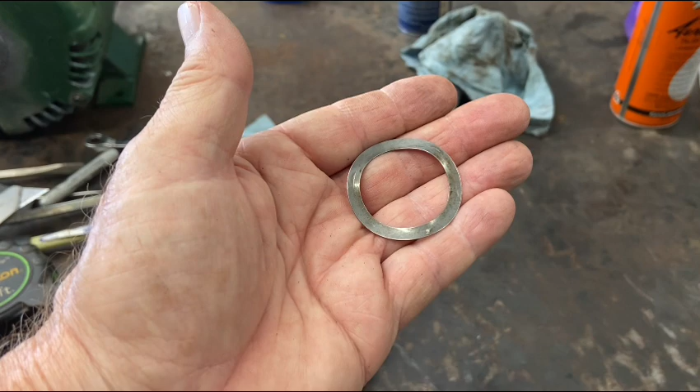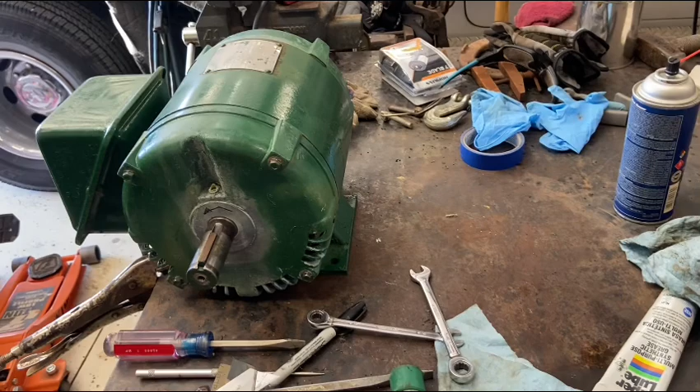Well, it's a noisy beast, even after I lube the bearing, but it works. It would probably be less noisy if I remembered to put the thrust washer in on the one side for the bearing. So back apart it comes. Well, noise-wise, that's not much better. But at least the thrust washer's back in where it's supposed to be.

Yeah, we got a reasonably decent coast down too. I'm just chalking this up to a noisy motor. To be honest, I really don't care.

Okay, enough about motors. Let's start laying out for a steel base for the drill press. And once that's done, I'll see if I can't configure a way to mount a motor to do belt drive. I did annotate the motor rotation on the cover there, so I know which way that thing's spinning, because that's kind of critical for when I hook up belts. I don't want that drill press spinning backwards.

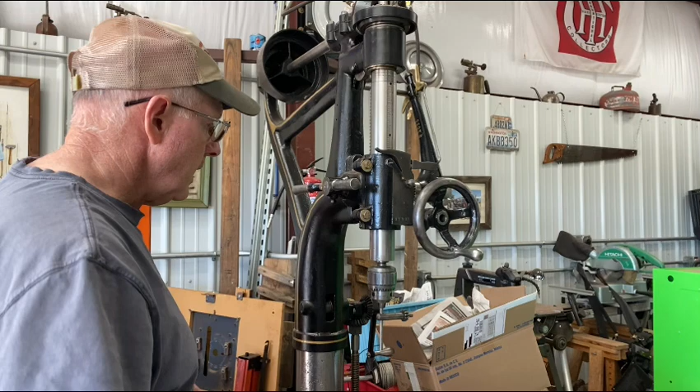Okay, for this chuck to spin in the right direction for drilling, this upper pulley has to turn counterclockwise as you're facing the drill press. So that tells me how I have to orient that motor. Well, here, let me show you. I have to orient the motor such that this pulley spins in this direction.

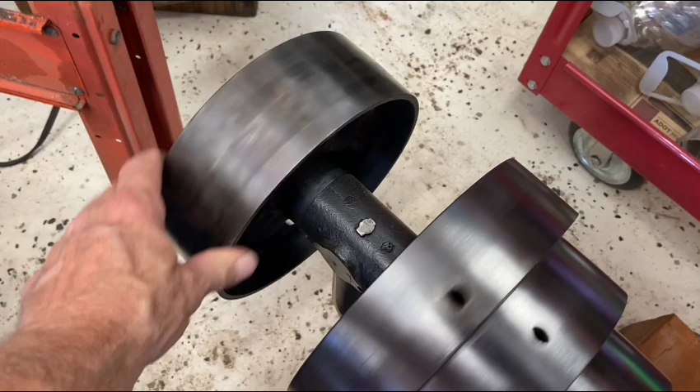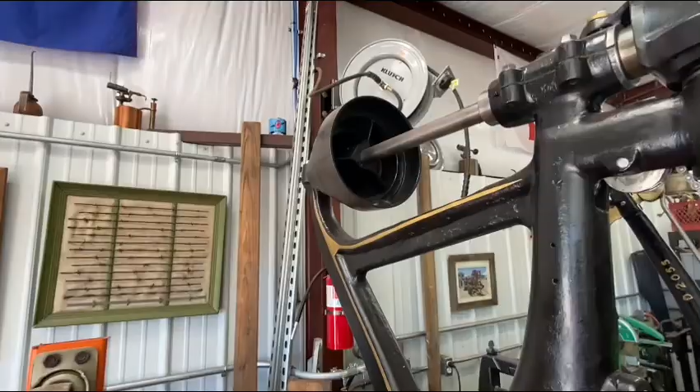Yeah, so I got a belt from there up to here. That's one long belt. That's going to cost me a small fortune at Bearing, Belt, and Chain. But anyway, you get the idea what I'm about here. So I got to get the tape measure out and the sketchbook.

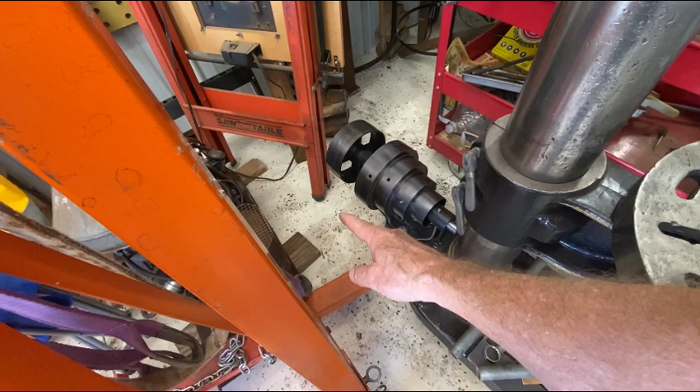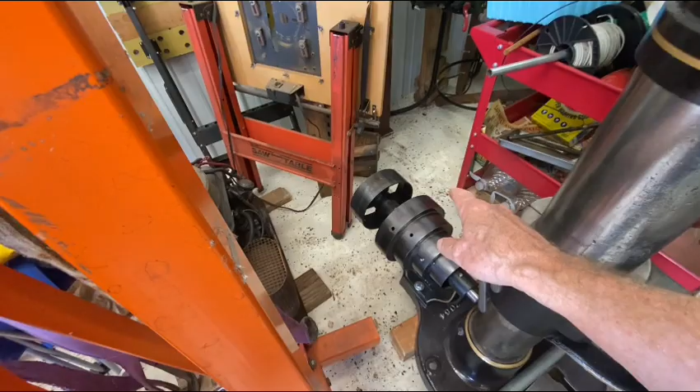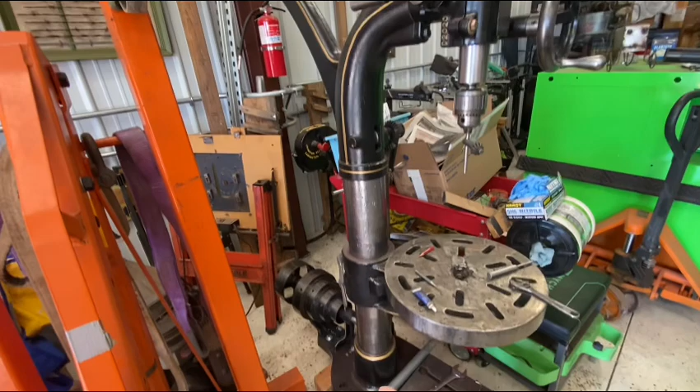I won't bore you with much of that, but I got to measure up this base, how I'm going to do it. Of course, I'm going to have a basic framework under the bulk of the drill press here, but I also got to run it back that direction because I have to build a motor mount to mount back there to run that pulley, and also so I can have rear casters back here so this whole thing doesn't have a tendency to tip backwards. I'm going to have a lot of weight on the back side of this, so it will have a tendency to tip backwards unless I can counteract that with a frame and casters back there. All right, so I'm going to get to measuring.

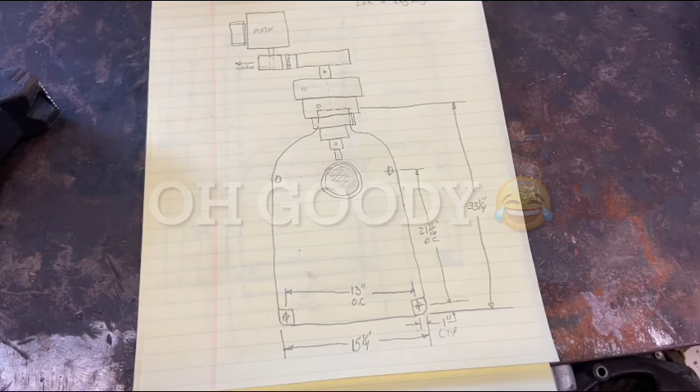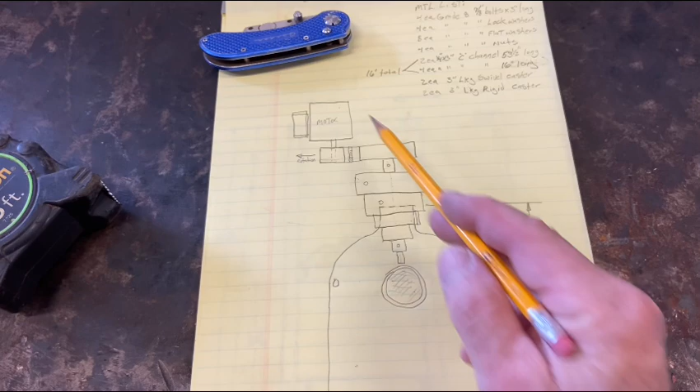Okay, it's chicken scratch sketch time. I laid out a plan view, or an overhead view looking down, of the base of the drill press and where the column is, and the step pulleys, and then the driven pulley from the motor. And because of the rotation of the motor, I got to mount it farther back like that with the shaft pointing at the drill press. Basic thing is 15 1/4 wide. Overall length of the base is 33 1/4, but I got to go beyond that to provide support for the motor.

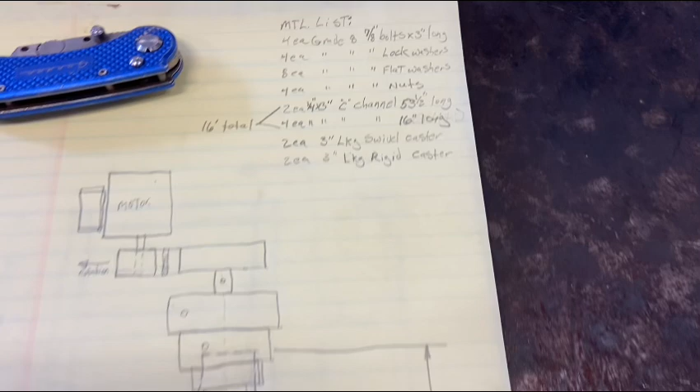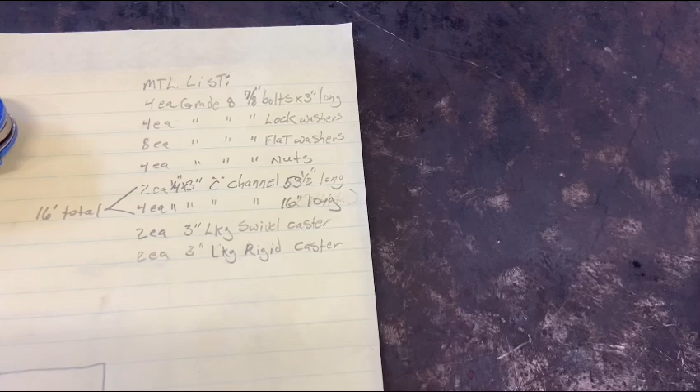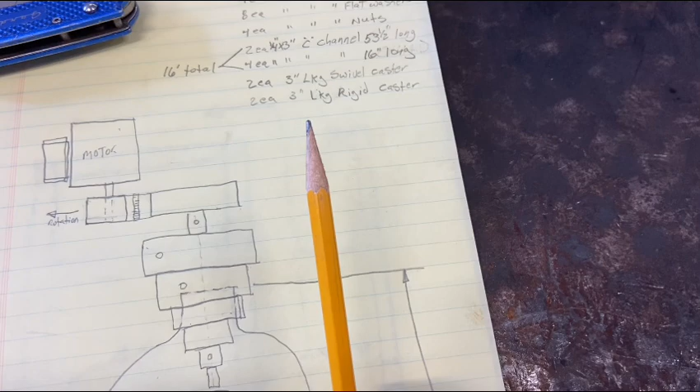So I threw together a basic material list. I'm going to use 1/4 inch thick 3-inch C-channel. I'm going to have to go buy some grade 8 bolts. The holes in the base are 7/8. Good luck finding those. I'll probably have to go with 3/4, which I'm not really fond of doing, but I'll do it if I have to. I'm going to get some 3-inch swivel casters and rigid casters, and they got to be locking so this thing doesn't move.

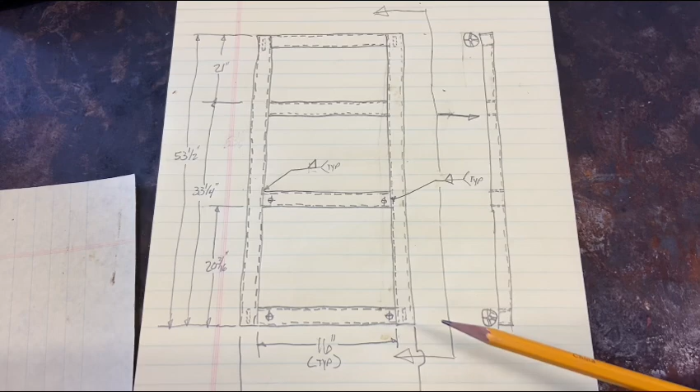So the basic support frame is going to be a ladder style frame. I'm going to have 2 rails on each side, and then the ladder rungs, if you will, are going to be 16 inches long, and they're going to be spaced such that they center over the holes in the base of the drill press, and then I'll go beyond. This would be the very back of the drill press where the step pulleys attach to the base. And then I got to go beyond that with a framework at the end. I haven't figured out yet exactly how I'm going to mount that.

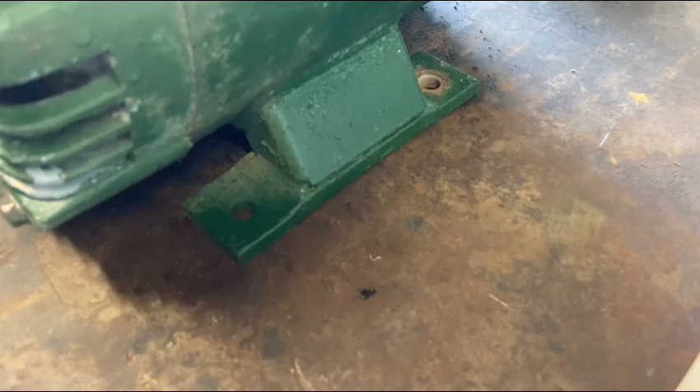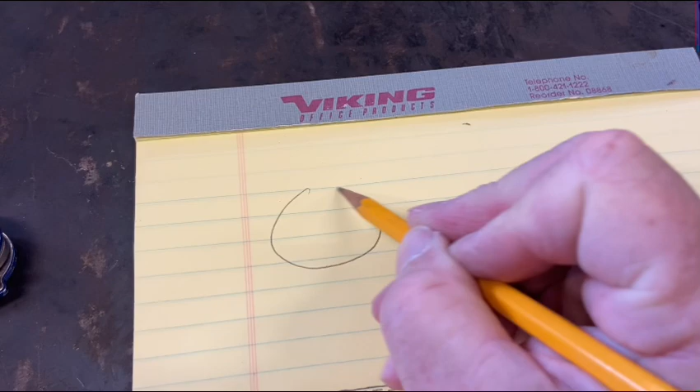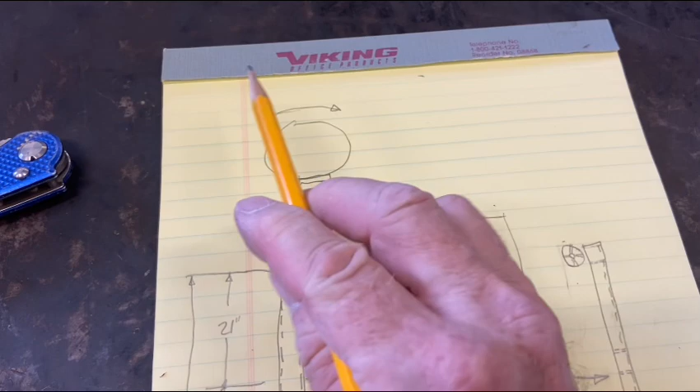I'm going to have a flat plate on the bottom so I can attach to the holes in the flat bar on each side. But I'm probably going to use square tubing and do something like this. I've got a flat plate here, and then I'll probably have tubing coming down like so, attached to some round stock that's going to weld across here, such that this thing will pivot back and forth from here.

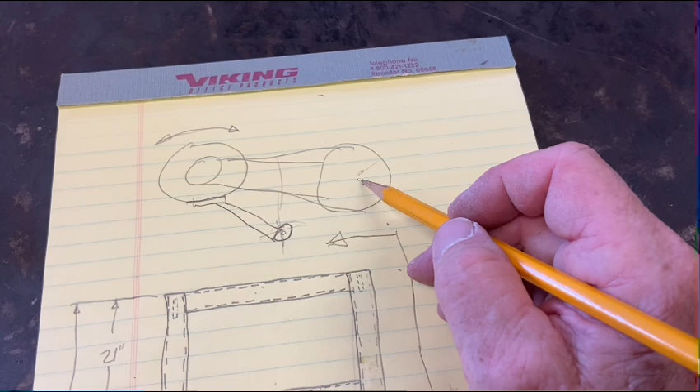And the weight of the motor, because I'm going to have a pulley here with a belt coming down to the driven pulley on the drill press that attaches to the step pulleys. So I'm thinking the weight of the motor itself would probably be sufficient to keep that belt taut, but just in case, I'll probably have some kind of a provision for a spring coming down like so.

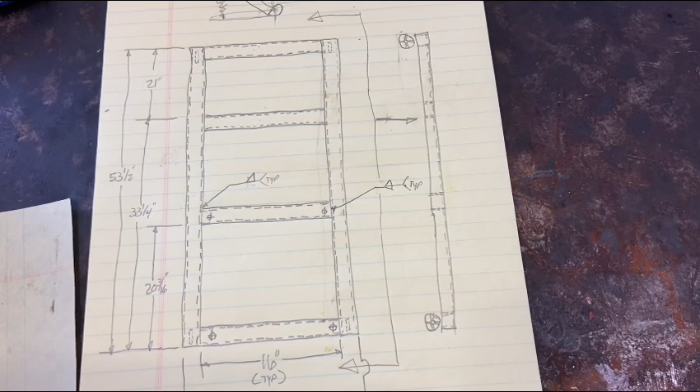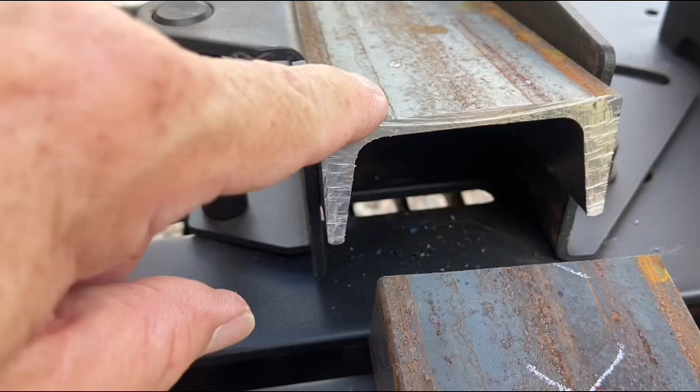Real basic, simple setup. So I got all my dimensions laid out. When I get all this cut, I'm just going to tack weld it together and then do some test fitting. So let's get to cutting some material. Check out that cut. There's hardly any burr. And this thing is cool to the touch. I love these Evolution saws.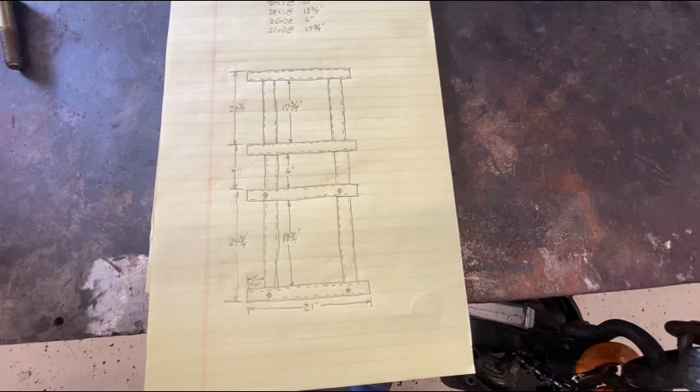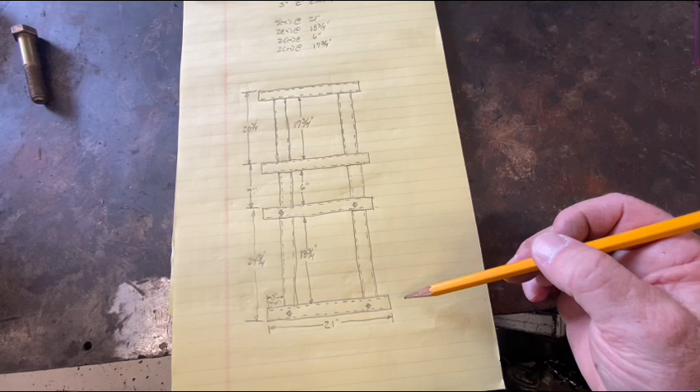I've changed my design somewhat. The base of that drill press is only 15 inches wide, which means it's going to be really tippy because it's top heavy. So from here to here is 15 inches. I've added 3 inches on each side with my ladder style design to give me 3 inches additional on each side of the drill press base, and that's where I'm going to land the casters, and that'll give it a little more stability. It's going to be quite a bit more welding for me, but oh well.

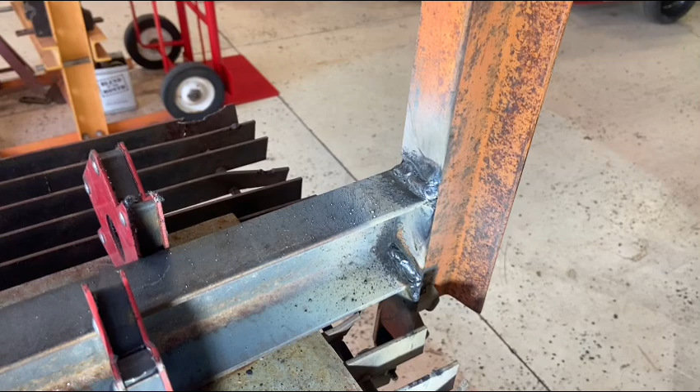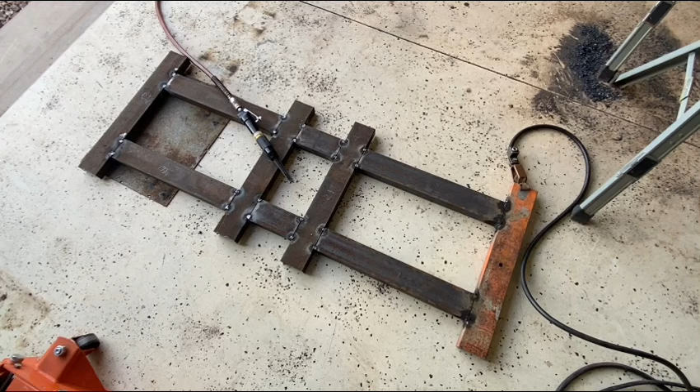A Gorilla Glob with the best of them. Well, there it is, all tacked together. Now I got to raise that thing up, slip this under it and clamp it somehow, match mark the mounting holes, and just make sure everything fits and is lined up good. And then go ahead and drill holes, finish welding this thing, paint it, and then bolt it to the bottom of that drill press.

But that is for another video because this one's getting pretty long. So I think I'll cut this one off here. This bottom support frame is the last major hurdle on this drill press project. The rest of it's going to be kind of minor stuff. Swapping out bolts, cleaning it up a little bit, making belts and hooking them up.

So yeah, the old GE electric motor, that's going to be a long-term thing. So I'm probably going to finish out this video series without it. And then when I eventually do get it revived, then I'll feature it and we'll swap it out on the drill press at that time. But for now, closing in on getting this thing done. It's been almost a year. Holy smokes. Time flies.